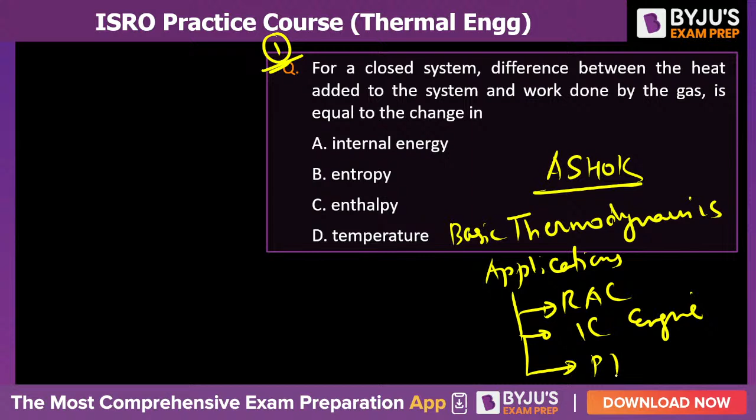So what is the answer? What is the closed system? A closed system is one where no mass transfer is allowed. It does not involve any mass transfer, only energy transfer takes place.

The system can be divided into 3 types based on the possibility of mass and energy transfer: closed system, open system and isolated system. So if it is a closed system, it means there is no mass transfer taking place.

The difference between the heat added to the system, Q, and the work done by the system, W, that is Q minus W, will be how much? So the question is from the first law of thermodynamics, isn't it?

We know Q is equal to delta U plus W. According to the first law of thermodynamics, is this expression valid for a reversible process or an irreversible process?

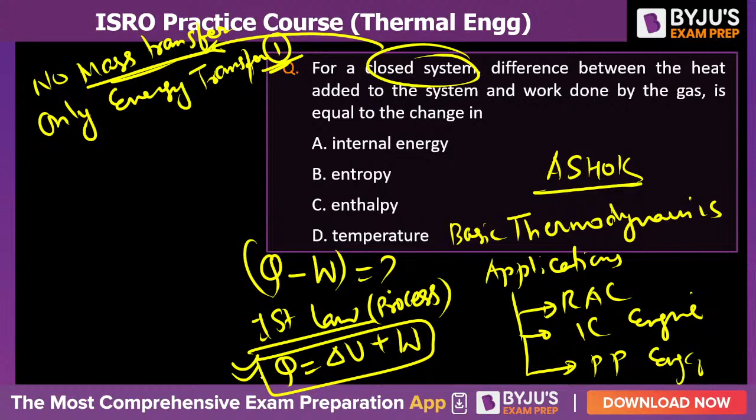So Q minus W we can find out as the change in internal energy of the system. Q minus W is equal to delta U. Is it valid for a reversible process or irreversible process?

It will be valid for all processes, whether reversible or irreversible. It is valid for reversible as well as irreversible process. But the expression is only for a process, not for a thermodynamic cycle. There is a difference.

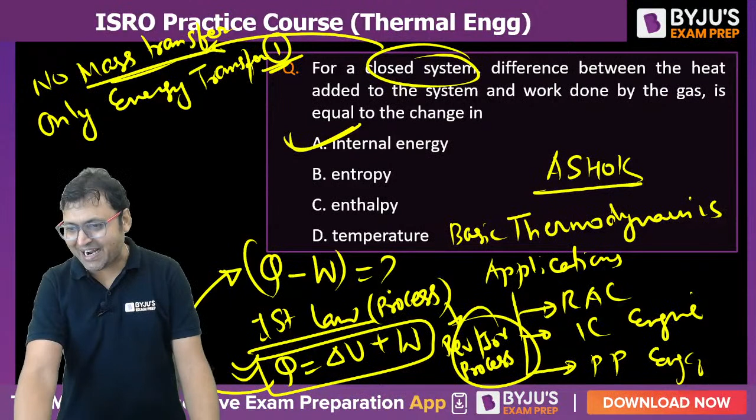The condition for reversibility of a cycle. Which expression is correct for reversibility of a cycle?

Yes, that is known as Clausius inequality. According to Clausius inequality, the cyclic integration of del Q by T.

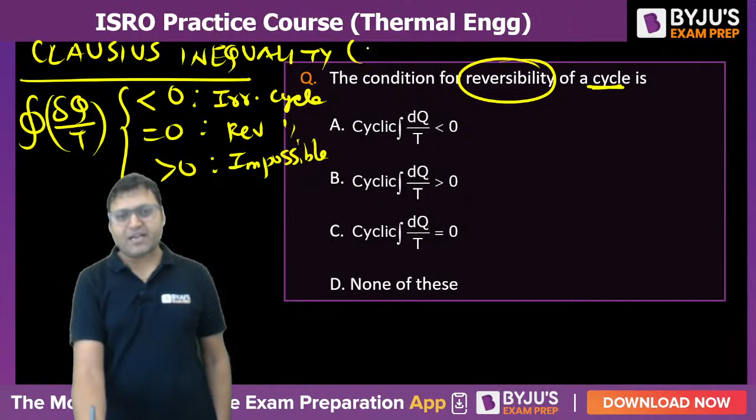According to Clausius inequality, if the cyclic integration of del Q by T is less than 0, then the cycle will be irreversible. If it is equal to 0, the cycle will be reversible, and if it is greater than 0, the cycle will be impossible. So Clausius inequality applies for reversible as well as irreversible cycles.

So according to Clausius inequality, it will be the cyclic integration of del Q by T. Clausius inequality is defined only for a cycle. So for reversibility, the cyclic integration of del Q by T must be what? What is the answer?

For a reversible cycle, it must be equal to 0. Yes.

So Clausius inequality is the basis of the definition of entropy. The cyclic integration of del Q by T, or del Q by T reversible, is called the change in entropy. Do you know that? That is nothing but the change in entropy of a system undergoing a reversible process.

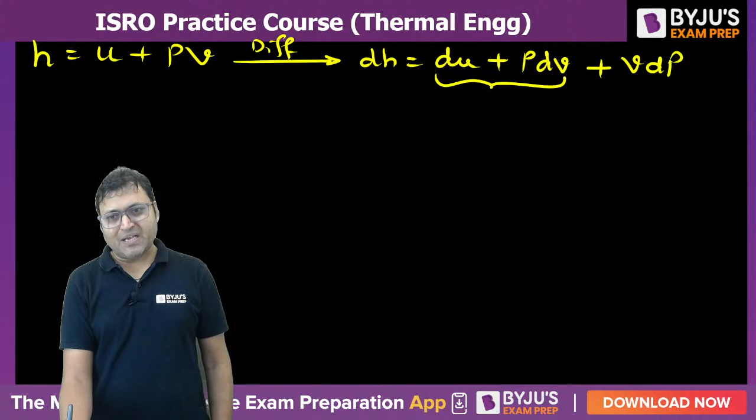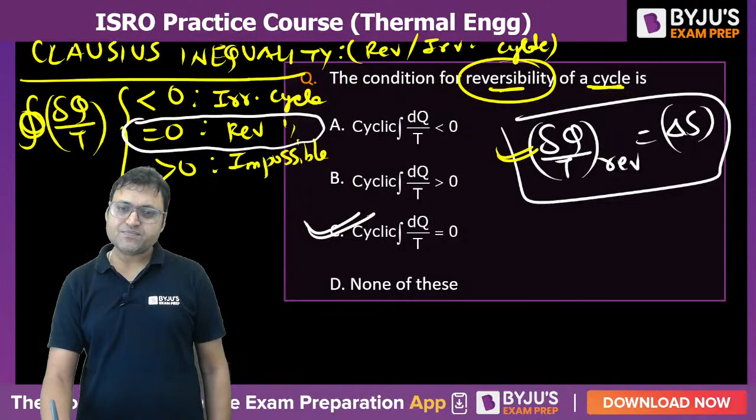From the first law of thermodynamics, du plus P dV, can we write this as del Q plus V dP? And del Q can be written as TdS. I told you in the previous question, TdS is equal to del Q for a reversible process. By default, we are talking about a reversible process, so del Q is equal to TdS.

According to the TdS equation, we can write TdS is equal to Cp dT minus T into dV by dT at constant pressure, into dP. That is the second TdS equation, isn't it?

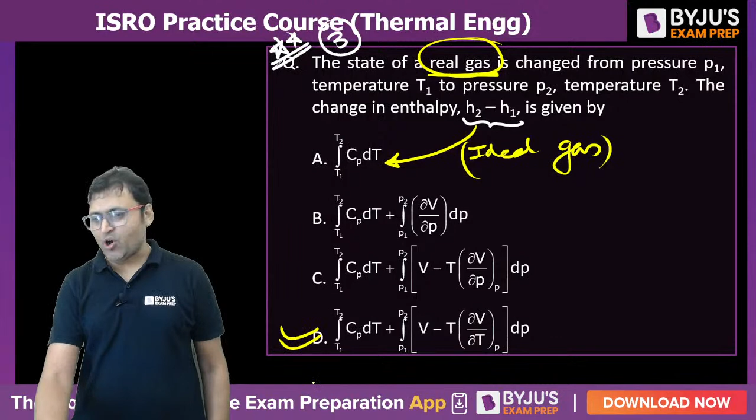It will be T, sorry, this is the expression plus V dP. This is dH. Let me first write it as Cp into dT plus V minus T dV by dT at constant pressure, multiplied by dP, taken as constant. If we integrate from 1 to 2, the expression will be integration of Cp dT, which is Cp into T2 minus T1, plus integration of V minus T dV by dT at constant pressure into dP. So the answer will be option D, isn't it? Option D will be the correct answer.

Do you understand it or not? This is the expression, this will be the expression, right?

The next question on your screen, question number 4. 1/100th of a kilogram, so the mass is 1 by 100 kg of air.

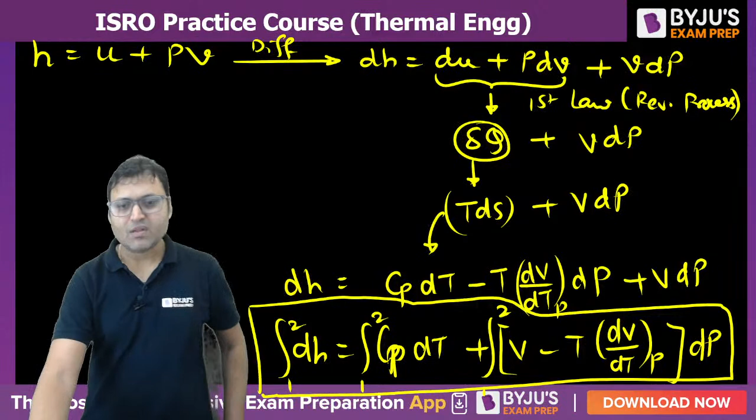Let me explain once again. The enthalpy is equal to internal energy plus flow energy. PV is called as flow energy. This is internal energy. You must know that enthalpy is given by specific enthalpy.

So if we differentiate, can we write dH is equal to du plus pdv plus vdp? This expression du plus pdv can be taken as del Q, according to the first law of thermodynamics. So it will be del Q plus vdp, and del Q will be TdS.

So there are two TdS equations. Let me write them. The first TdS equation is Cv dT plus T into dP by dT at constant volume, into dV. That is the first TdS equation. Then another TdS equation: Cp dT minus T into dV by dT at constant pressure, into dP.

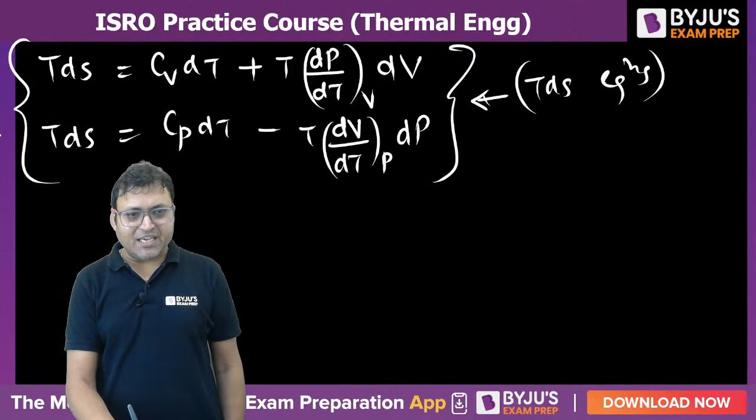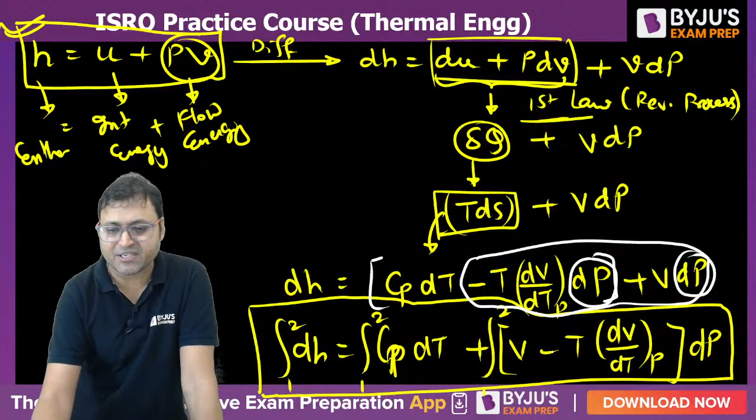So this TdS equation is written this way: Cp dT minus T into dV by dT at constant pressure, into dP. Are you getting it? That is what I have written. Between these last two expressions, if we take dP common, we can write it as V minus T into dV by dT at constant pressure. These are called TdS equations.

Right, let us move to the next one. Question number 4: 1/100th of a kilogram of air is compressed in a piston cylinder device. At any instant of time when the temperature is 400 Kelvin, the rate at which work is being done on the air is...

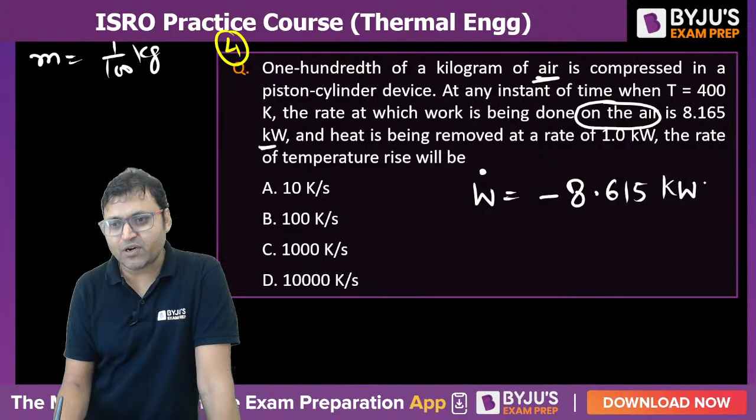8.165 kilowatt. It means the rate at which work is done on the system, W dot, can we write it as minus 8.165 kilojoule per second or kilowatt? And heat is being removed from the system, so we can say Q dot is equal to minus 1 kilowatt. Both will be negative. According to sign convention, heat added to the system is positive, heat removed is negative. Similarly, work done on the system is negative, work done by the system is positive. So both will be negative.

The rate of temperature rise: from the first law of thermodynamics, if we write per unit time, can we say Q dot is equal to delta U dot plus W dot? So Q dot is minus 1 kilowatt, and W dot is minus 8.165. So delta U dot will be equal to how much? Delta U dot is equal to 7.615, sorry, it is 7.165.

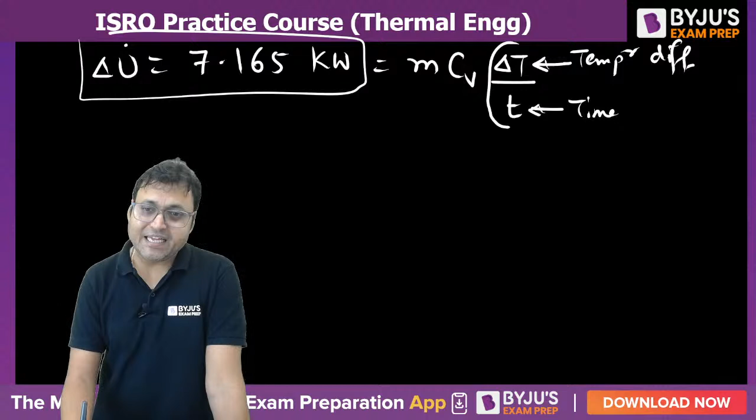So that's 7.165 kilowatt. So this delta U dot can be written as M into CV into delta T by t, where t is time and delta T is temperature difference. Can we write this? Because it is per unit time, so dT by t is to be calculated.

So delta T by T is equal to delta U dot upon M into CV. Delta U dot is 7.165 kilojoule per second divided by mass which is 1 by 100 kg, into CV, that is for air it is 0.718 kilojoule per kg Kelvin.

If you simplify along with the units, you will get the unit of your answer will be Kelvin per second. Kilogram getting cancelled out, kilojoule getting cancelled out with this kilojoule. So it will be 7.165 into 100 upon 0.718 Kelvin per second, or degree Celsius per second will also be correct, because we are talking about the temperature difference. Either way it does not make a difference.

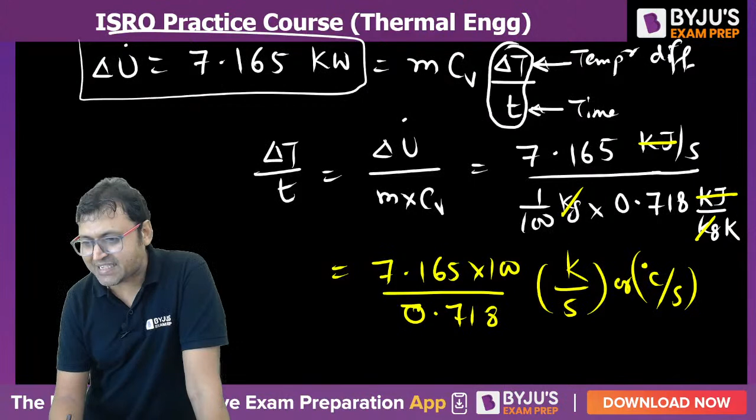If the options would have been in degree Celsius per second, then also your answer would have been the same. Do you understand it or not? You would not find any difference in your final answer, because as long as we are talking about temperature difference, we can either write it as degree Celsius or Kelvin. I hope this is clear to everyone.

So what is the answer? We can write it as around 0.7165 into 1000 upon 0.718. These two are almost the same, so it is around 1000 Kelvin per second will be the right answer.

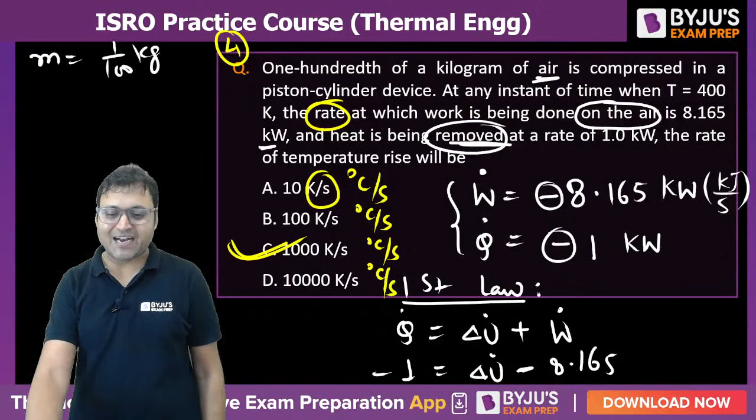I hope this is clear. It is about the rate per unit time. The question is about the rate, that is per unit time. So mass into CV into delta T by T will give you the answer for change in internal energy per unit time. Is this clear to everyone?

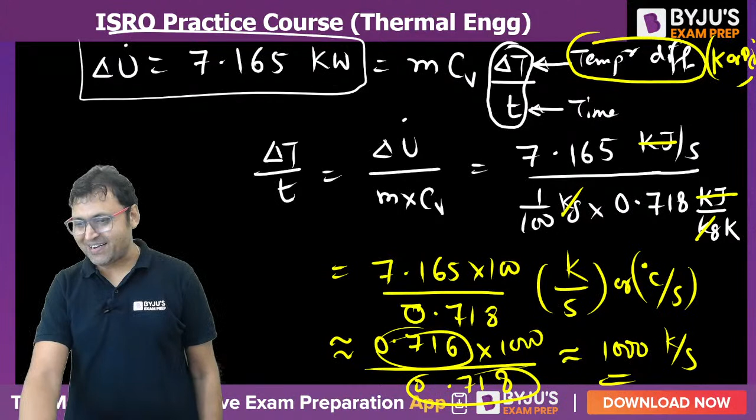Great, great. Keep it up. This is beautiful. This question is beautiful.

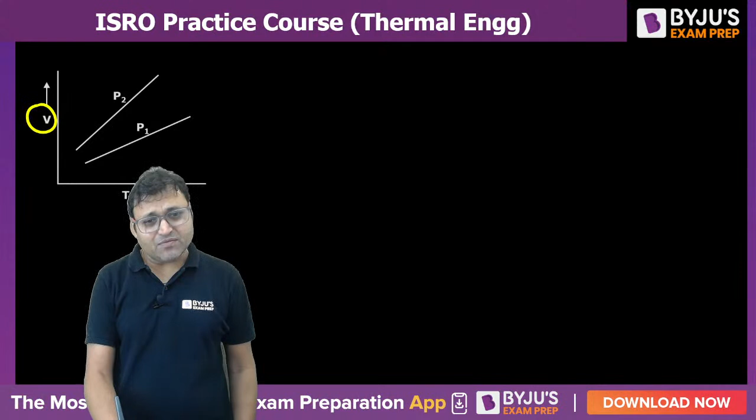So if we talk about the slope, what is the slope of the curve? Slope is equal to dV by dT at constant pressure. Do you agree or not? If the curve is between V and T, then the slope will be dV by dT at constant pressure.

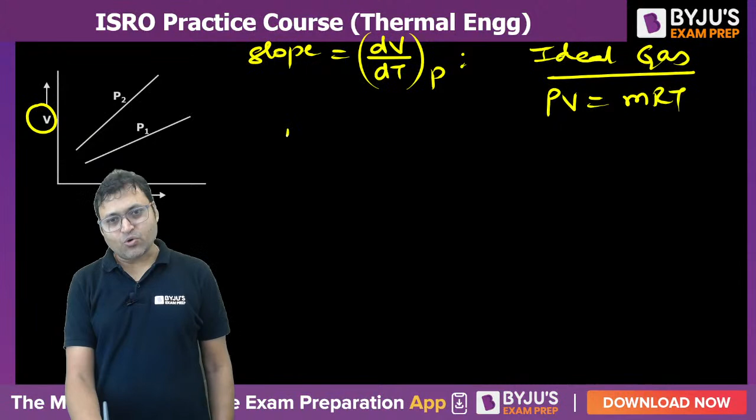Isn't it, the slope will be dV by dT at constant pressure. Now because it is an ideal gas, we can say PV is equal to mRT. So at pressure constant, if we differentiate, P into dV is equal to m constant, R constant, into dT. So dV by dT at constant pressure is equal to mR by P. That is the expression for the slope.

Do you agree 2 is having more slope than 1? Which is having more slope? The one which is more inclined. This is theta 1, this is theta 2. So we can say theta 2 is greater than theta 1, so slope of 2 is greater than slope of 1.

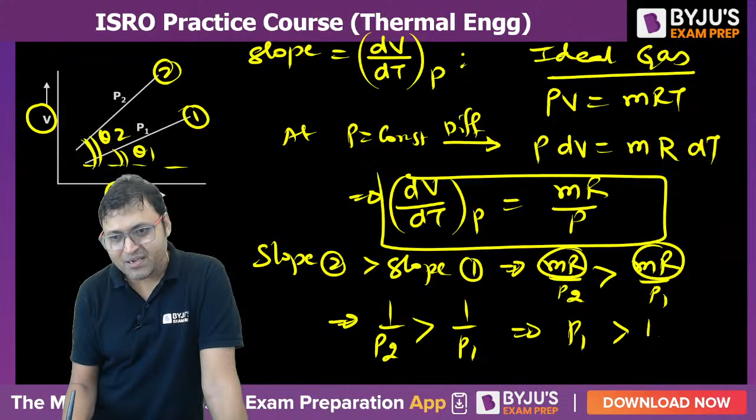So can we say mR by P2 must be greater than mR by P1? Slope of 2 will be greater since 2 is more inclined, having more slope, theta 2 more than theta 1. So mR by P2 is greater than mR by P1. Since mR is constant, 1 by P2 is greater than 1 by P1, or can we say P1 will be greater than P2? Do you agree or not? P1 will be greater than P2.

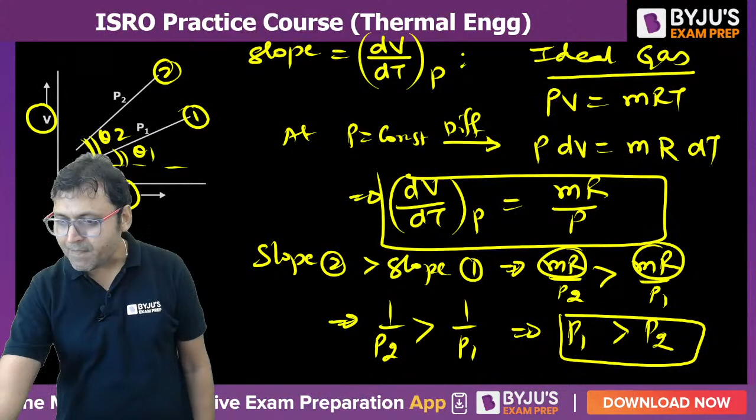I hope this is clear. P1 will be greater than P2. The pressure P1 will be greater than P2.

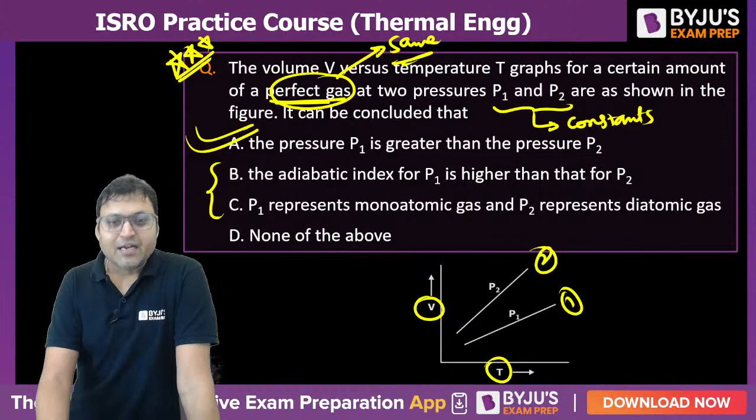Now what about B and C? The adiabatic index for P1 is higher than P2. What is adiabatic index? That is the ratio of specific heats. This is adiabatic index, and adiabatic index depends on the type of gas. It depends on the type of gas. For example, if it is a monoatomic gas,

it is not a function of pressure. It is not a function. Adiabatic index is not a function of pressure. Adiabatic index only depends on the type of the gas.

For monoatomic gas, it is 1.66. For diatomic gas, it is 1.4. For multiatomic gas or polyatomic gas, it is 4/3, that is 1.33 something. So it depends on the type of the gas.

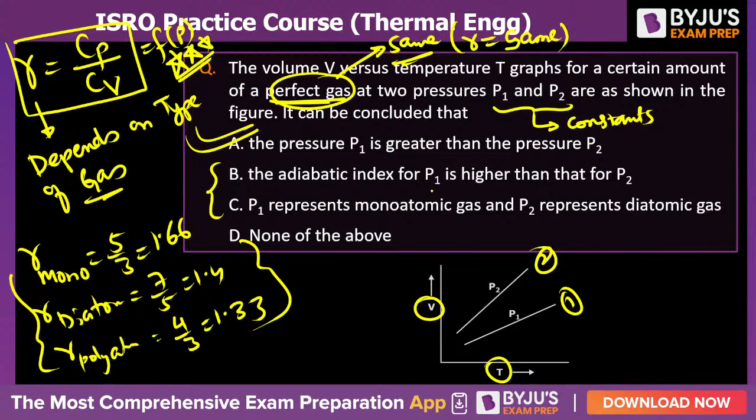So whether it is P1 or P2, it will represent the same gas. Whether it is monoatomic or diatomic, it will not be different at different pressure. I hope this is clear.

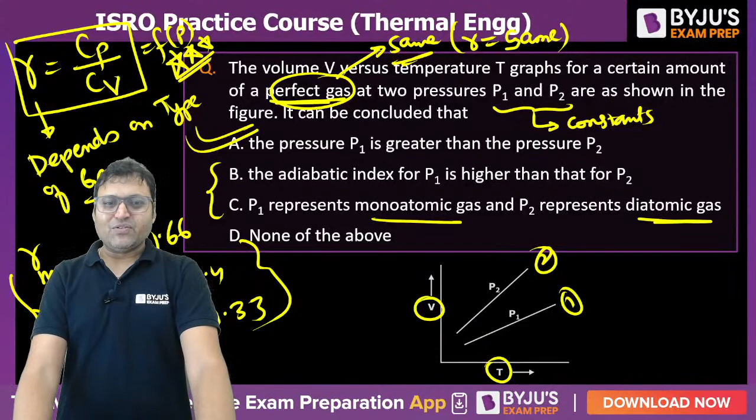Yes, aspirant, well done. So that is why option A will be the correct answer for this given question. The next one, question number 6 on your screen. Yes, everyone, please do let me know your answer.

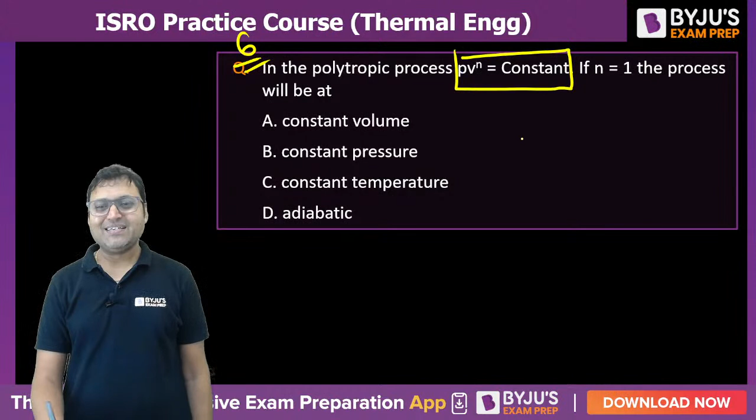In the polytropic process, PV to the power n is constant. If n is equal to 1, what will the process be? If n is equal to 1, then it will become PV is equal to constant. What does that mean? It means temperature is constant. So it is isothermal. If n is equal to 1, it is isothermal.

If n is equal to 0, what is the process? For n is equal to 0, V to the power 0 will be equal to 1. If n is equal to 0, then we can say P will be constant. It will be constant pressure. If n is equal to infinite, then V will be constant. It is the constant volume process.

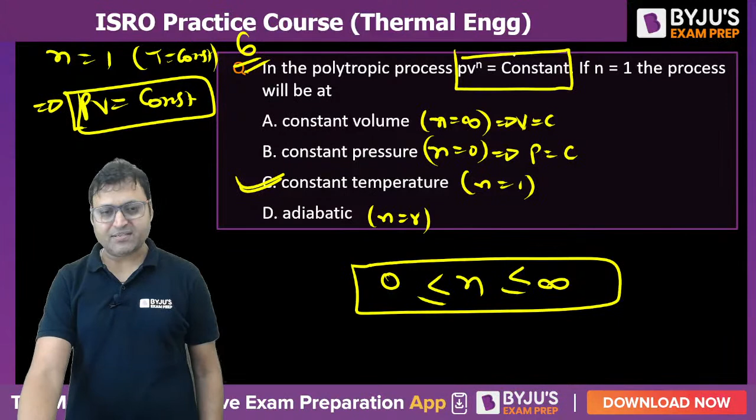And if n is equal to gamma, then it is adiabatic. So n lies between 0 to infinity. The value of n lies between 0 and infinity. So if n is equal to 1, it is constant temperature process. If n is equal to gamma, it will be adiabatic. If n is equal to 0, it will be constant pressure, and if n is equal to infinite, it is constant volume process, isochoric process.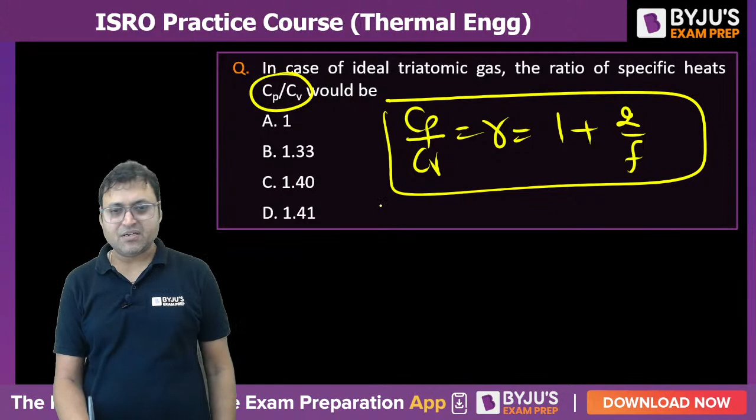In case of ideal triatomic gas, the ratio of specific heats, Cp by Cv is equal to gamma. It depends on degree of freedom. This is the expression. F is the degree of freedom for molecular motion. And for ideal triatomic gas, the degree of freedom will be equal to 6.

This is the expression. It depends on degree of freedom. The ratio of Cp by Cv is depending on the type of the gas. I have told you, type of the gas means the degree of freedom. So for ideal triatomic gas, F is equal to 6. So we can say Cp by Cv is equal to 1 plus 2 by 6, that is 1 plus 1 by 3, that is 4 by 3 will be the answer. 4 by 3, how much is that? 1.33. B is the correct answer. Yes, Vinay? B will be the right answer.

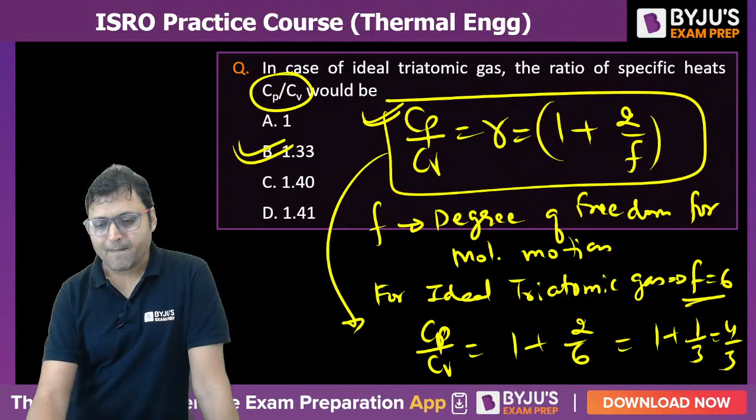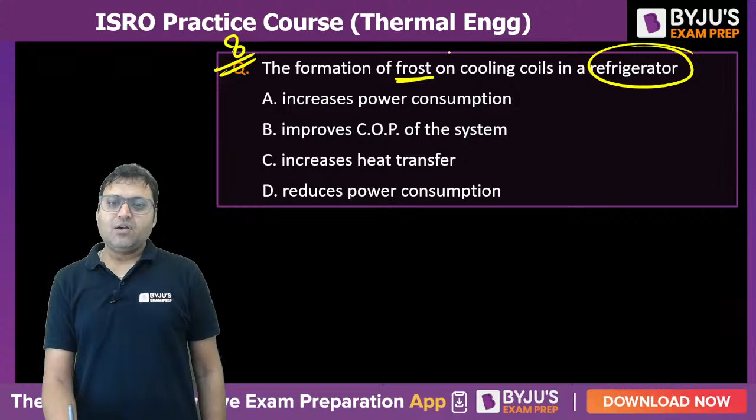Let us move to the next one. Question number 8. Next question, question number 8. The formation of frost on the cooling coils in a refrigerator. When does the frost appear on the cooling coil?

The frost appears when the temperature becomes less than the freezing point temperature. When the temperature decreases below the freezing point of water, then what happens? The moisture gets condensed into ice. Then what happens? The moisture gets cooled and frost appears.

It gets cooled and frost appears on the cooling coil. When the temperature of the cooling coil becomes less than the freezing point of water, then the water vapor or moisture present will get condensed or cooled, and the frost appears on the cooling coil. That is how frost appears on the cooling coil.

So what happens when frost appears on the cooling coil? It increases the power consumption because it reduces the rate of heat transfer in the evaporator. It does not increase heat transfer, it provides an extra layer of thermal resistance. The frost acts as a thermal resistance, so it decreases the rate of heat transfer and increases the power consumption.

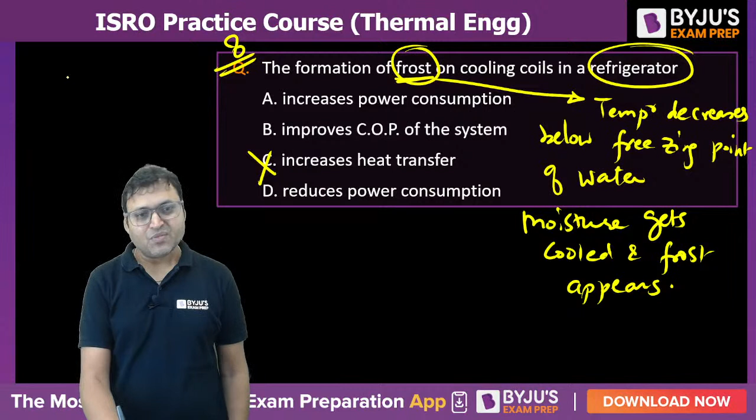COP is Q2, the refrigeration effect, upon work input. So since it increases the power consumption, if Win increases, then COP will reduce. COP will decrease and power consumption will increase. Option A will be the correct answer.

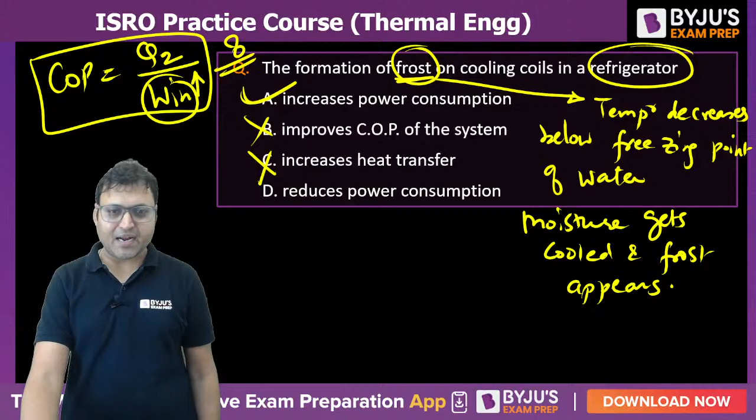Let us move to question number 9. The question is from IC engine, basically the balanced chemical reaction. In order to completely burn 1 kilogram of methane with the balanced chemical reaction, the minimum number of kilograms of oxygen needed will be...

The frost appears outside, so to decrease it, the frost appears outside, that is why it is not appearing on the refrigeration or the refrigerant side. On the cooling coils, there is a refrigerant flowing, so here the frost appears. So it will not allow the heat to get removed from the refrigerant.

If you want the refrigerant to be cooled to a desired temperature, then we need to give extra power, so the power consumption will increase. Here there is frost. Frost appears on the outside of the cooling coils, not towards the refrigerant.

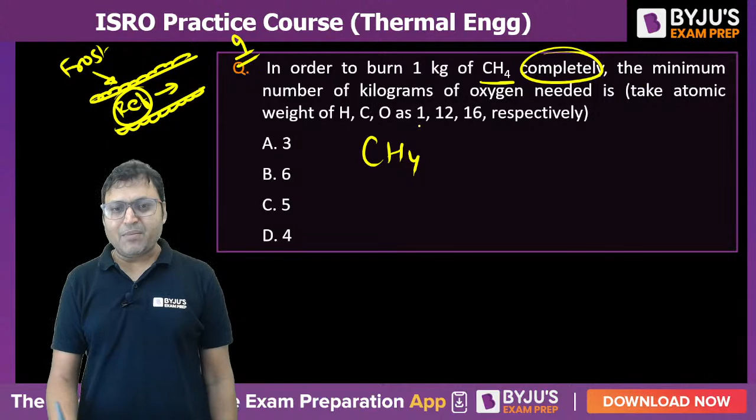What is the answer to the next one? In order to burn 1 kilogram of methane CH4, the minimum number of kilograms of oxygen O2 will give rise to carbon dioxide and water vapor. This is the reaction. Carbon atoms on the LHS are 1, on the RHS are 1.

Oxygen atoms on the RHS will be 3, on the LHS will be 2. So if we make it 4 on the left hand side and put 2 here, then oxygen atoms will be 4 on the LHS and RHS, and the hydrogen atoms will be 4 on LHS and RHS. So we will put 2 here.

So 16 kg of methane requires 64 kg of oxygen, and we need the number of kilograms of oxygen needed. So 1 kilogram of oxygen will require 16 by 64 kg of methane. Sorry, we want the methane required. The minimum number of kilograms of oxygen needed is...

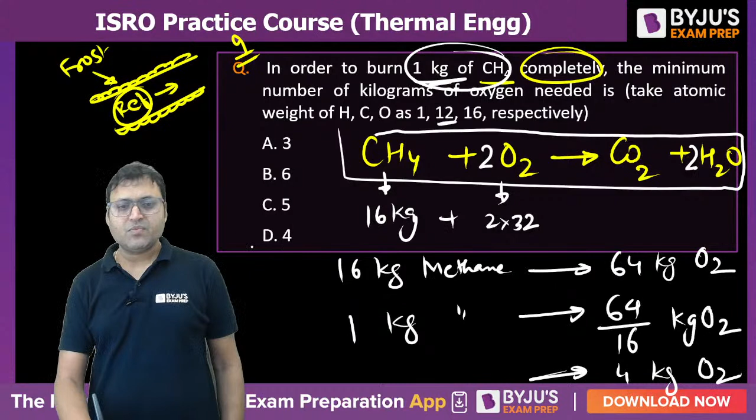What is the confusion here? The minimum number of kilograms of oxygen needed in order to burn 1 kg of methane. 1 kg of methane requires 64 divided by 16 kg of oxygen, isn't it? So it will be 4 kg of oxygen. D is the answer. D will be the correct answer. 64 by 16 kilograms of oxygen will be required.

The next one, question number 10. What is the answer to the next one? An open cycle gas turbine works on...

Whether it is open cycle or closed cycle gas turbine, it works on the Brayton cycle, which is also called the Joule cycle, having 2 isentropic processes and 2 isobaric processes. So it works on the Joule cycle.

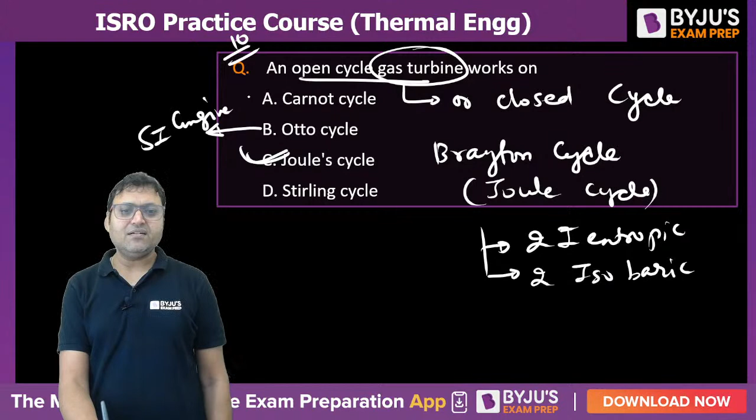SI engine works on the Otto cycle. Carnot cycle is not practically possible, not a practical cycle. No engine or equipment works on a Carnot cycle. Stirling cycle has 2 isothermal processes and 2 isochoric processes, that is called the Stirling cycle. So the answer to this question is Joule's cycle, right?

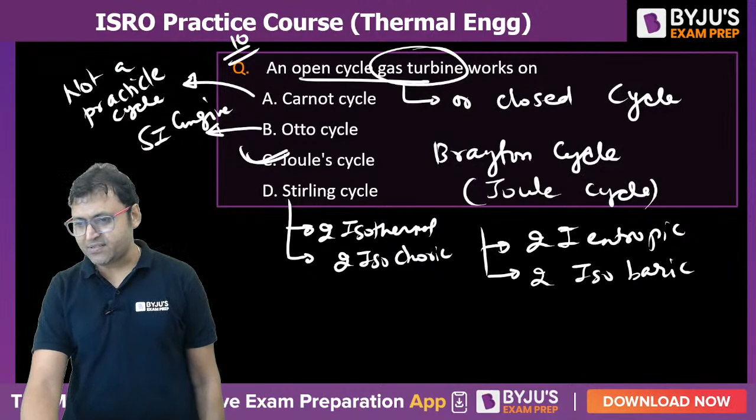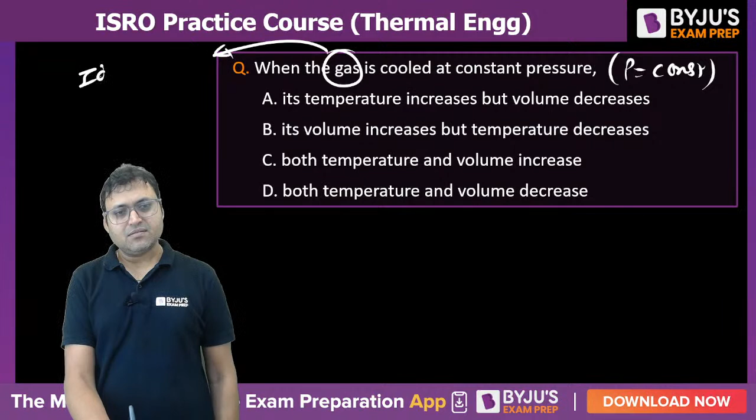This question is simple. When a gas is cooled at constant pressure, what happens? When a gas is cooled, it's a closed system. If it is an ideal gas, we can say PV equals mRT. So if pressure is constant, V is directly proportional to T. For a closed system, mass is constant, R is constant, so V is directly proportional to T. Cooling means temperature is decreasing, which gives rise to a decrease in volume, or compression. So constant pressure compression is the same as constant pressure heat rejection. Both temperature and volume decrease. D is the answer.

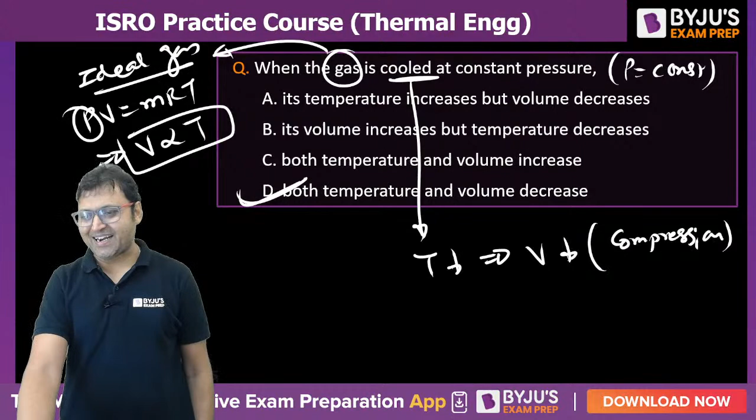Shall we proceed further? The next question again from the ideal gas law. As per Charles' law, the volume of a given mass of a perfect gas varies as its absolute temperature. Let me tell you, there are three laws which are combined together to give the ideal gas equation.

One is called Boyle's law. According to Boyle's law, pressure and volume are inversely proportional to each other for a constant mass, at a constant temperature.

Then comes Charles' law. According to Charles' law, volume is directly proportional to temperature at constant pressure. Then it is Avogadro's law: mass is directly proportional to volume, or volume is directly proportional to mass, at constant temperature and pressure. These are the three laws combined together to give the ideal gas equation.

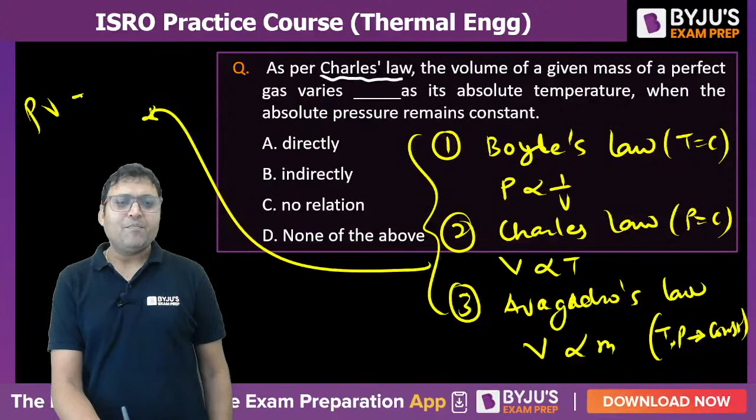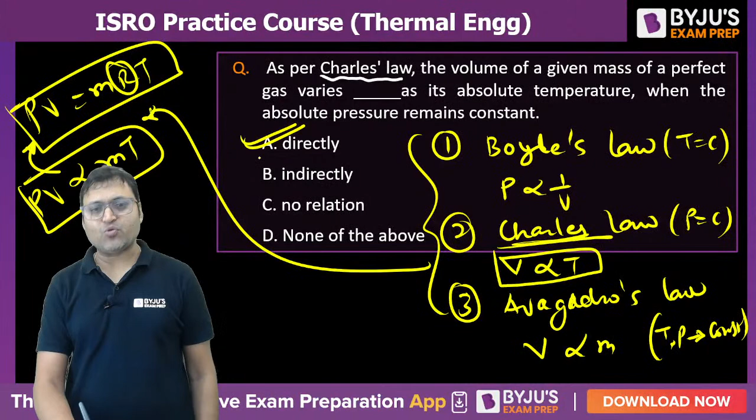If we combine them together, PV is given by mRT, or we can say PV is directly proportional to MT. R is the proportionality constant, so PV equals mRT. So the answer: Charles' law says volume and temperature are directly proportional to each other. Option A will be the correct answer for this one.

The next one: in an extensive property change of a thermodynamic system. What is extensive property? It's a property which depends on mass, which depends on the size of the system, the extent of the system, mass of the system. That is called extensive property, and it takes place due to change in mass.

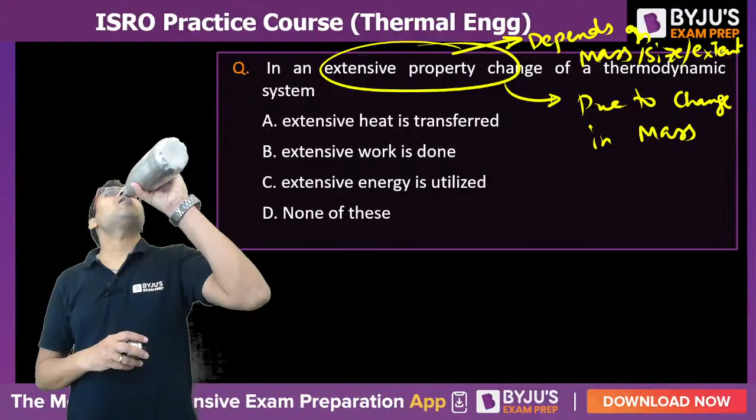In an extensive property change of a thermodynamic system, one option says extensive heat is transferred. That is incorrect - extensive means a very large amount of heat is transferred, but whether heat transfer takes place or not does not matter for extensive property, because extensive property change takes place only when there is mass transfer. Due to change in mass of the system, the extensive property changes, because it depends on the size or mass of the system. So whenever extensive work is done, work transfer does not guarantee a change in extensive property. Similarly, extensive energy being utilized will not guarantee the change in extensive property. The change in extensive property is guaranteed only when there is a change in mass. So A, B, C are all incorrect, and the correct answer is none of them. D will be the correct answer. The change in extensive property of a system depends on the change in mass of the system, because extensive property depends on the size of the system.

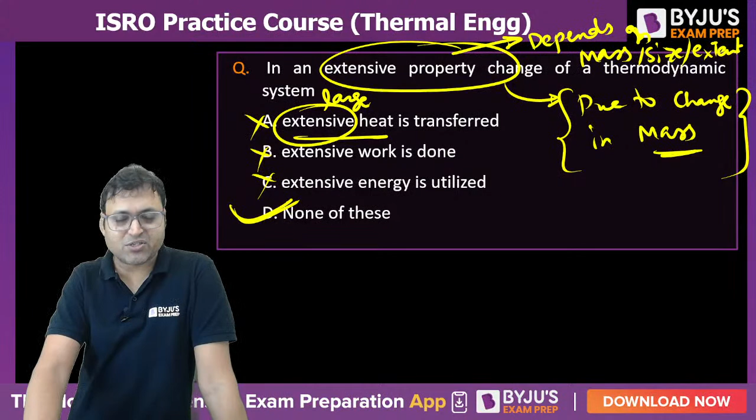The next one: an actual engine is to be designed having the same efficiency as that of the Carnot cycle. Such a proposition is - what is the answer? Do you know the efficiency of the actual cycle? If it is less than Carnot efficiency, then the actual cycle is irreversible. If it is equal to the efficiency of the Carnot cycle, then the actual cycle will be reversible. If it is greater than the Carnot cycle efficiency, then the actual cycle will be impossible.

So if the efficiency of actual cycle is equal to Carnot cycle, then your answer should be that the actual cycle should be reversible. Your answer will be reversible. But because no option carries reversible, and Carnot cycle is practically impossible, it is not practically feasible. It is practically infeasible. It is a theoretical concept.

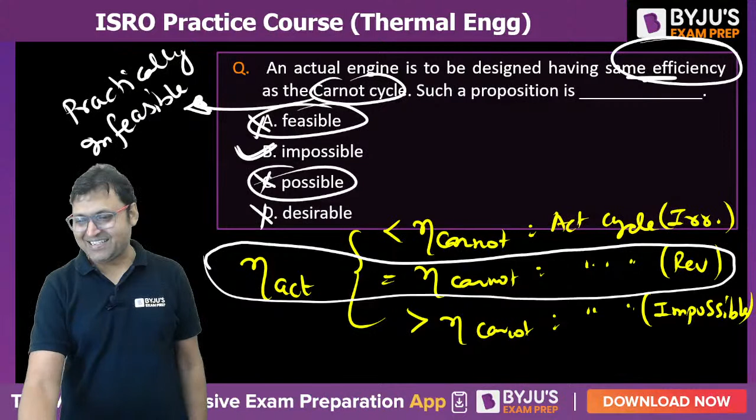Yes Aniket, this is how you can approach it. Yes, well done. So B is the more appropriate answer to this question.

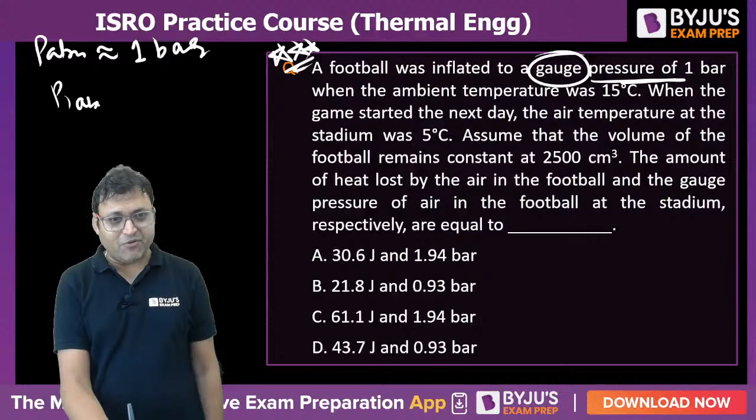It is a beautiful question. There is a football which is inflated to a gauge pressure of 1 bar. There is significance in giving the gauge pressure. If we assume the standard atmospheric pressure is around 1.013 bar, or we can take it around 1 bar, so it is inflated to an absolute pressure. What is P1 absolute? That is equal to 2 bar, isn't it? Because in PV equals MRT, we always use the absolute pressure. When the ambient temperature was 15 degrees Celsius, T1 absolute is 273 plus 15 Kelvin.

When the game started the next day, the air temperature at the stadium becomes 5 degrees Celsius. So T2 absolute is equal to 273 plus 5 now. Assume that the volume of the football remains constant at 2500 centimeter cube - convert it into meter cube. The amount of heat lost by the air in the football due to this change in temperature - there will be some heat loss.

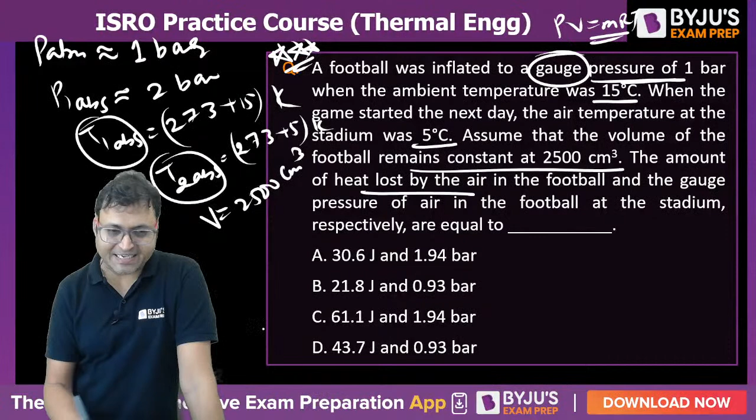So the amount of heat loss by the air in the football, and the gauge pressure of air in the football at the stadium, means we need to find Q loss, given by the first values, and P2 gauge, given by the second values. So if we find P2 gauge, try to find P2 gauge first, or try to find Q loss, because two options have the same values for gauge pressure, but if you see Q loss, each option has a different value. So first of all, find out the heat loss.

Can we call it M into CV, because it is a constant volume process, into delta T. Mass can be written as P1 V1 upon R T1, into CV into delta T. What is P1? Absolute - we need to take the absolute, so it is 2 bar, close to 2 bar, or we could have written 2.013 bar, or 2.013 bar, 2 bar or 2.013.

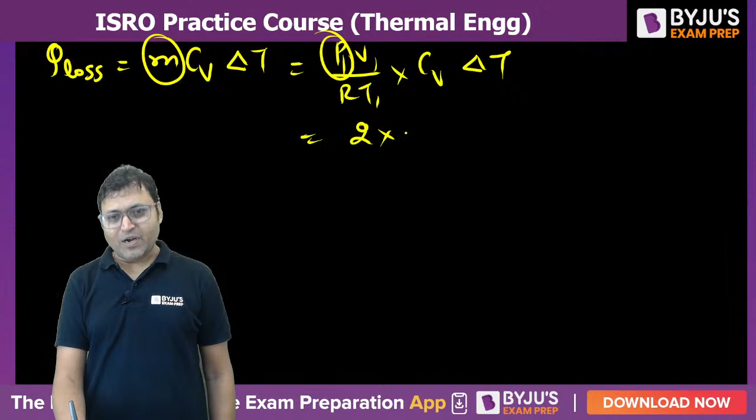What is volume? 2500 into 10 to the power minus 6, isn't it? 1 centimeter is 10 to the power minus 2 meter upon R. What is R for air?

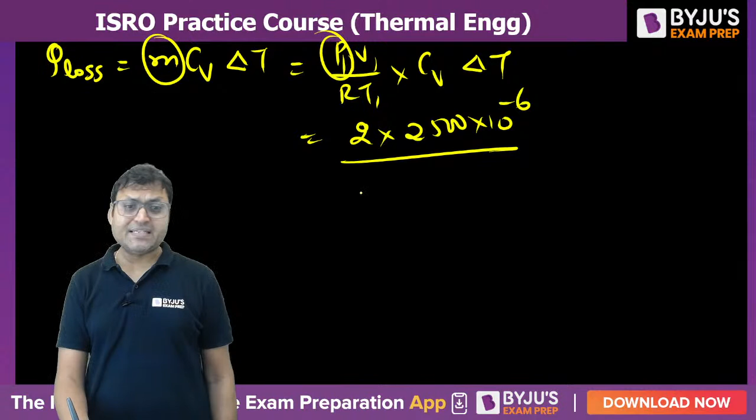287 into temperature T1. What is temperature T1? 273 plus 15, 288, into CV. What is CV? 718 into what did I write? Yes.

Delta T is 15 minus 5, that is 10. So that will be around this much joule. Can you solve it? Can you try solving this one?

So if you simplify this, then it will be... P1 is actually given in bar. Do not forget to convert, the way I forgot, 10 to the power 5 Pascal. It will be 10 to the power 5 Pascal. So if you simplify this, this 10 to the power 5 and these two will get cancelled out.

Then it will be 2 into 25, 50, then 00 into around 700 upon 300 into 300. Your answer will be near to this. These two, 4, 1, 2, 3, and then 4. So 350 divided by 9 something. What is 350 by 9?

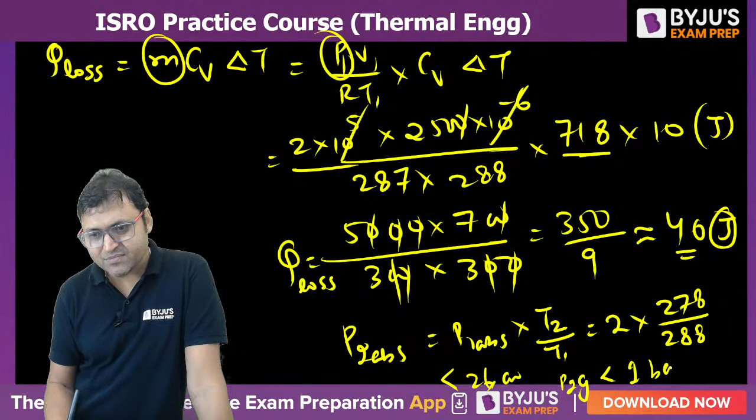So P2 absolute is less than 2 bar, and P2 gauge is less than 1 bar. It cannot be more, gauge pressure will be less than 1 bar. So it is 0.93 bar. D is the answer, D will be the answer.

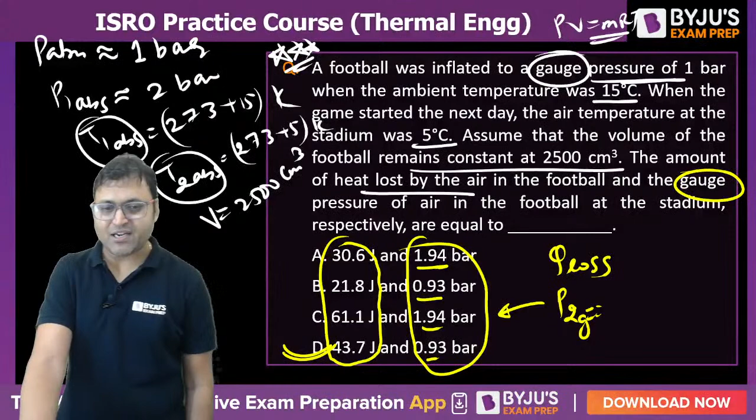I hope this is clear. This is how, without using the calculator, you can solve it. The question is to find out the gauge pressure of air. Absolute pressure will be less than 2 bar, close to 1.94 bar. Absolute pressure at point 2 will be 1.94 bar. But the question is about the gauge pressure, that is why 0.93 will be the correct answer. Option D will be the right answer for this one.

The next question: for a thermodynamic process to be reversible, if we want a process to be reversible, the temperature difference between the hot body and the working substance should be...

The temperature difference, whenever there is a temperature difference, it gives rise to heat transfer. So for a reversible process, for reversible heat transfer, it should be isothermal. If we want reversible heat transfer, it should be an isothermal process, so the temperature difference will be almost zero.

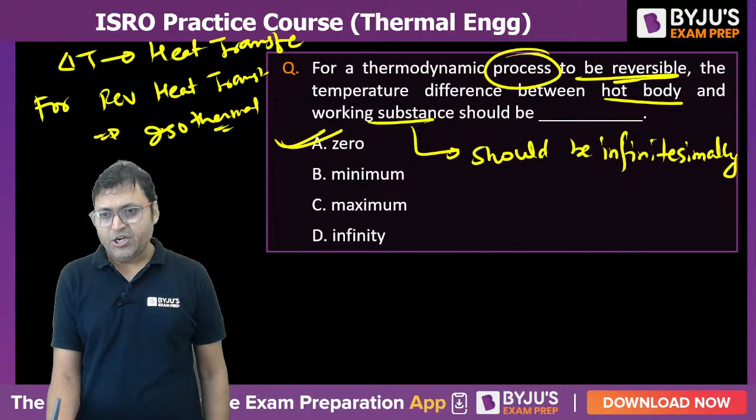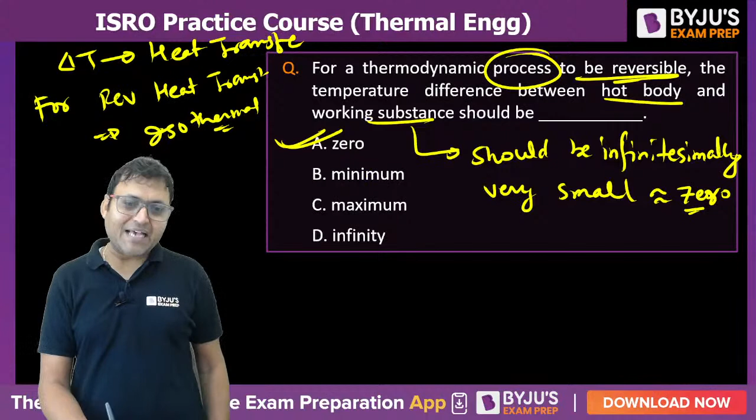The heat transfer will be reversible only when it is isothermal, or due to very low temperature difference. The temperature difference between the hot body and the working substance should be very, very low, infinitesimally very small, almost zero. So the answer will be 0. Isothermal heat transfer is called reversible heat transfer.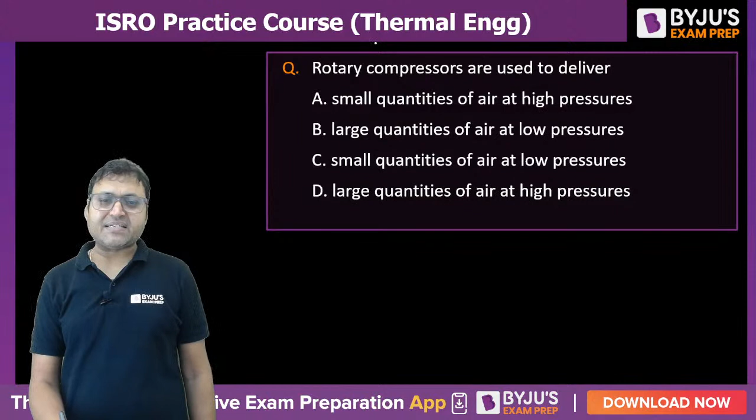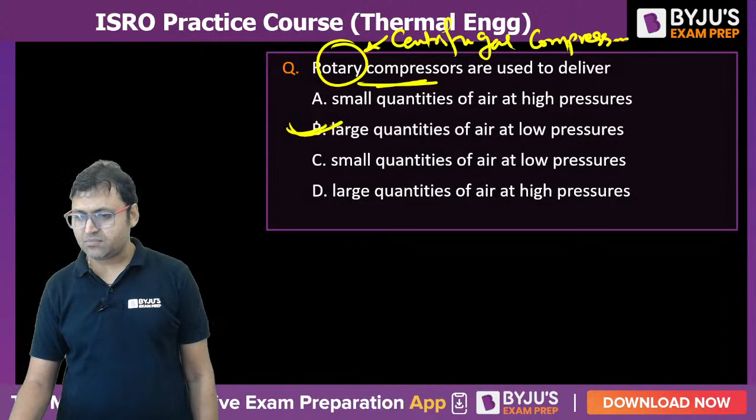The next one: rotary compressors are used. Rotary compressors are centrifugal compressors which have a rotating unit, the rotor. Rotary compressors are used to deliver a large quantity of air at low pressure, while a small quantity of air at high pressure is delivered by translatory compressor.

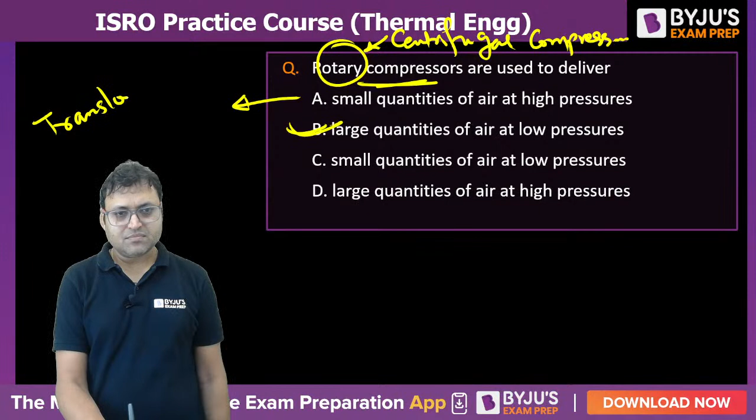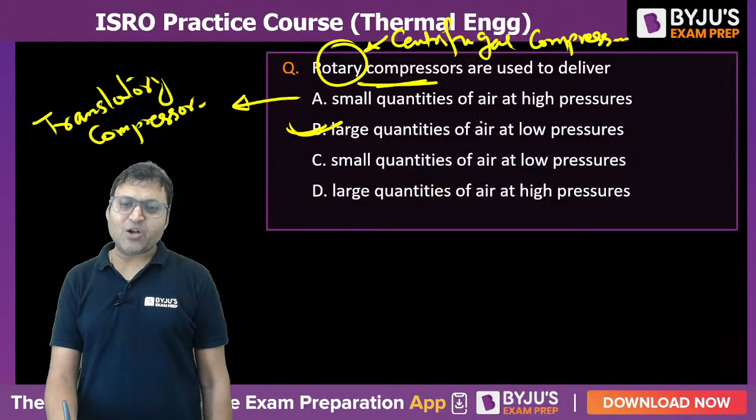If it would have been a translatory compressor or reciprocating compressor, it would have given small quantities of air at high pressure. So B will be the answer.

The next one: an aeroplane is flying at a height of 12 km where the temperature is minus 35 degrees Celsius. The speed of the aeroplane corresponds to Mach number 2. Find the speed of the plane if the R value and its specific heat ratio are given. What is the speed of the plane, V?

Mach number is equal to V by C. We can write V as under root of gamma RT. So V is equal to M into under root of specific heat ratio into R, characteristic gas constant, into T.

Put the value 2 into under root of gamma, around 1.4, R is 287, into absolute temperature. It is 273 minus 35, so it will be 238 Kelvin.

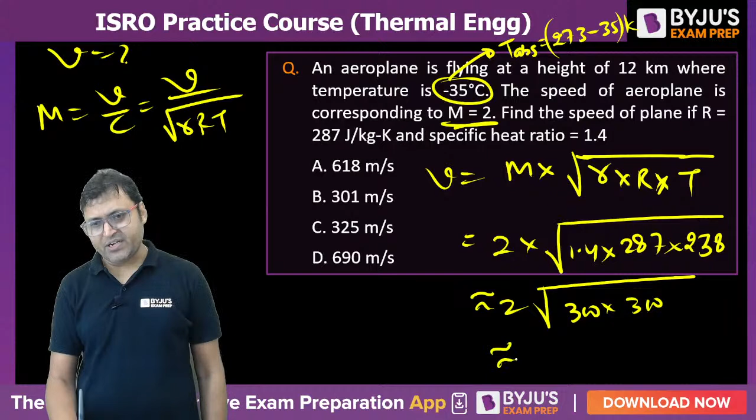So it will be around twice of under root, we can call it 300 into 300. So it will be around 2 into 300, around 600. The one which is near to 600 will be the answer. It will be greater than 600 because 238 into 1.4 is greater than 300. So the answer will be option A.

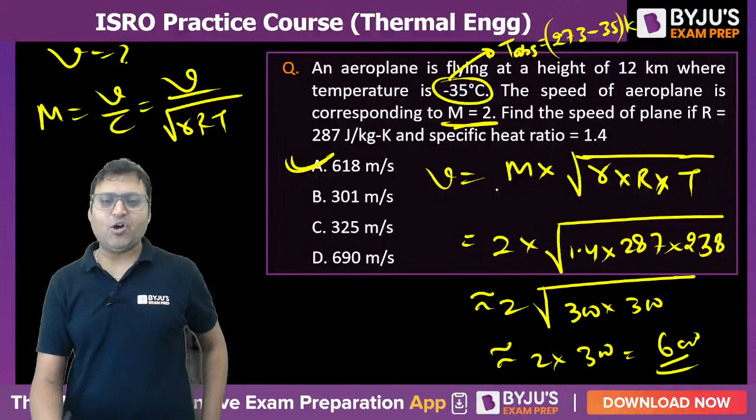All right, so let us quickly solve the remaining question and the session will be over.

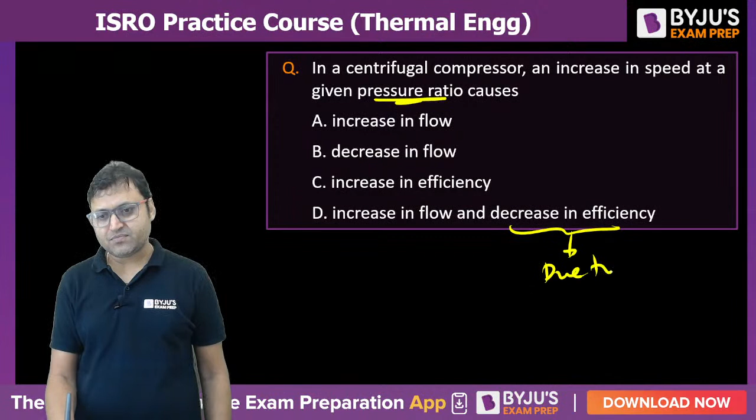In a centrifugal compressor, an increase in speed at a given pressure ratio: when the speed increases, it will deliver more discharge, increasing the flow rate. But due to high flow rate, there are chances of shock waves, which will decrease the efficiency. So it will increase the flow and decrease efficiency. D will be the answer.

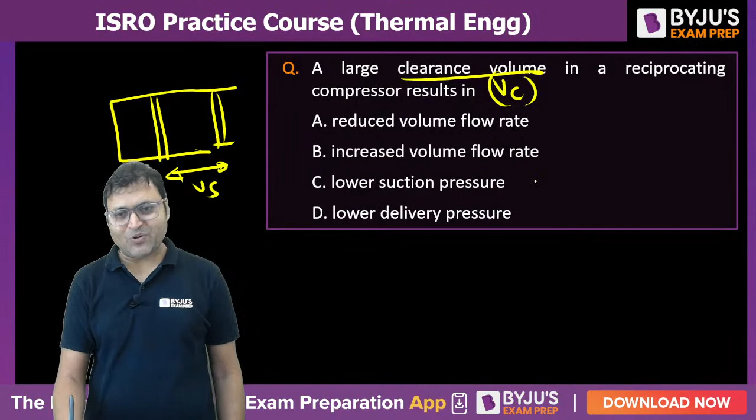A large clearance volume: if the clearance volume VC is very large in a reciprocating compressor, it will result in low volume flow rate, because the volume flow rate corresponds to the swept volume. So if VC increases, VS will decrease, reducing the volume flow rate.

Next, second last question for the day: if the air fuel mixture ignites before the spark takes place at a spark plug, the condition is called. This is in an SI engine - the burning of air fuel mixture before the actual initiation of the spark.

That is called pre-ignition, and it happens due to local overheating caused by detonation. If there is detonation, it causes high temperature, and due to very high temperature there are chances of pre-ignition taking place in the SI engine. C will be the answer.

And the last question says: the diagram which shows the correct crank position corresponding to the opening and closing of the valve.

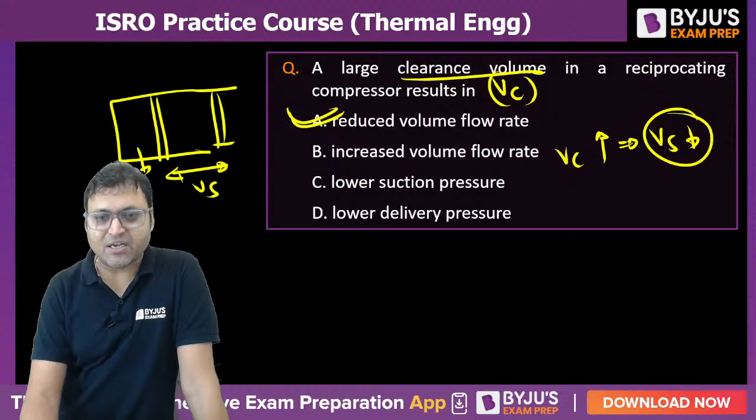Yes aspirant, knocking takes place in SI engine. The answer will not be knocking or detonation, because knocking takes place at the end of combustion in an SI engine.

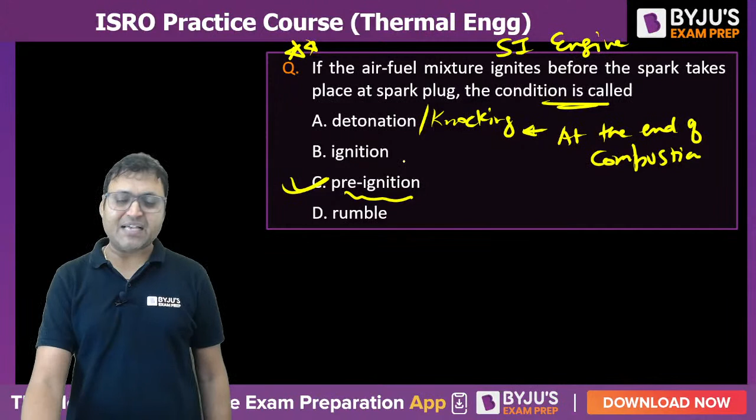And due to combustion, or due to knocking at the end of combustion, in the next cycle there are chances of pre-ignition because of local overheating of the air fuel mixture.